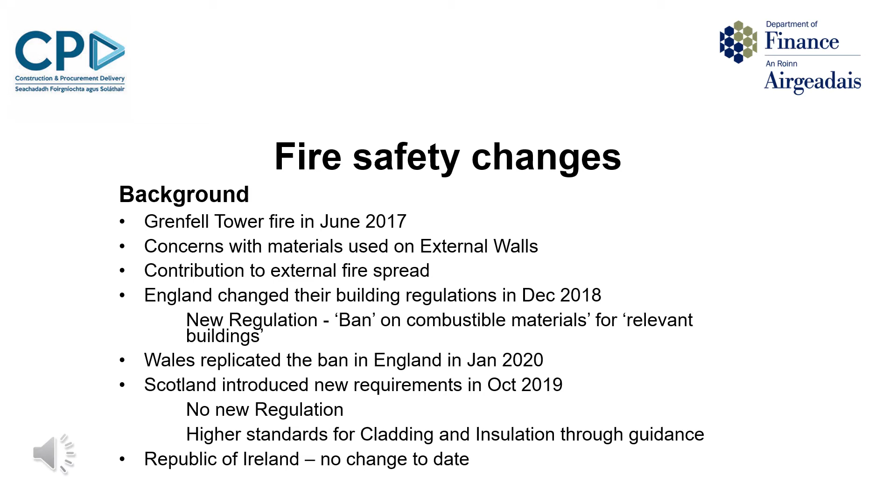Wales followed suit and replicated the ban in England, coming into effect in January 2020. Scotland have not introduced an outright ban for now through regulation, but have implemented higher standards for cladding and insulation on their buildings through guidance. The Republic of Ireland have made no changes in relation to external fire spread requirements and hold the position currently in line with here prior to these changes being made. So this amendment replicates the bans introduced in England and Wales.

At the heart of these changes is a new requirement in Part B of the Building Regulations, which will be new Regulation 23(2). It reads, subject to paragraph 3, building work shall be carried out so that materials which become part of an external wall or specified attachment of a relevant building are of European classification A2-s1, d0 or Class A1, classified in accordance with BS EN 13501-1:2018. Obviously, there are key terms within this new regulation which have been underlined to highlight their importance.

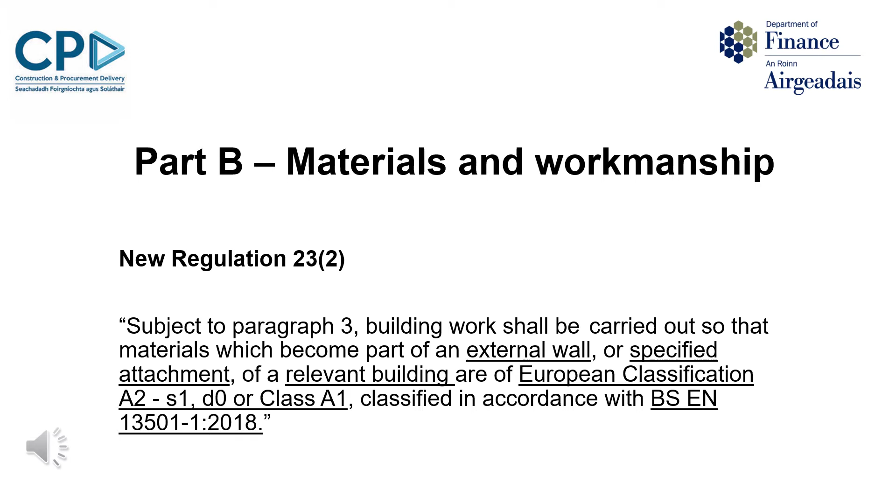So Regulation 23(2) applies to external walls and specified attachments of relevant buildings only. New definitions are given in Regulation 22 of Part B for external wall and specified attachment. Basically, the external wall incorporates everything from the internal finish outwards. Attachments subject to the new requirement are specific to balconies, solar panels, and sun shading devices.

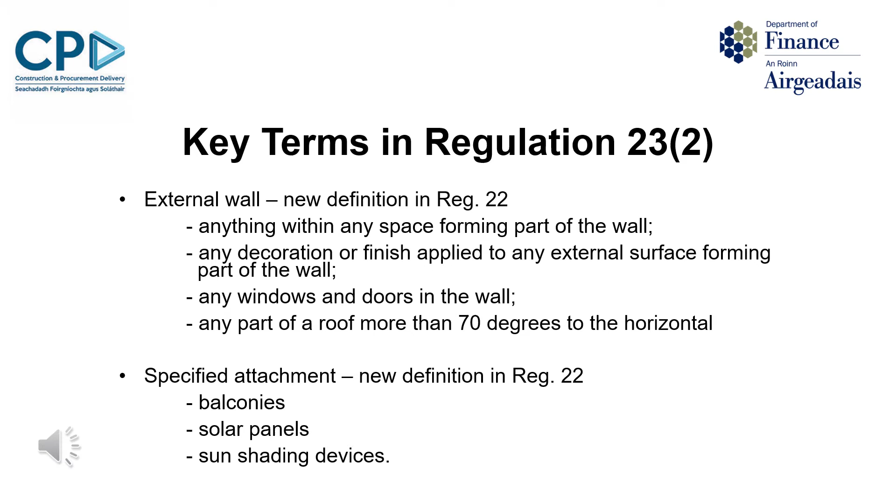A new definition for relevant building is also given in new Regulation 23(4). It reads, a building with a storey, not including rooftop plant areas, or any storey consisting exclusively of plant rooms, at least 18 metres above ground level, and which A, contains one or more dwellings, B, contains an institution, or C, contains a room for residential purposes, excluding any room in a hostel, hotel, or boarding house. Above ground level is also defined in new Regulation 23(4).

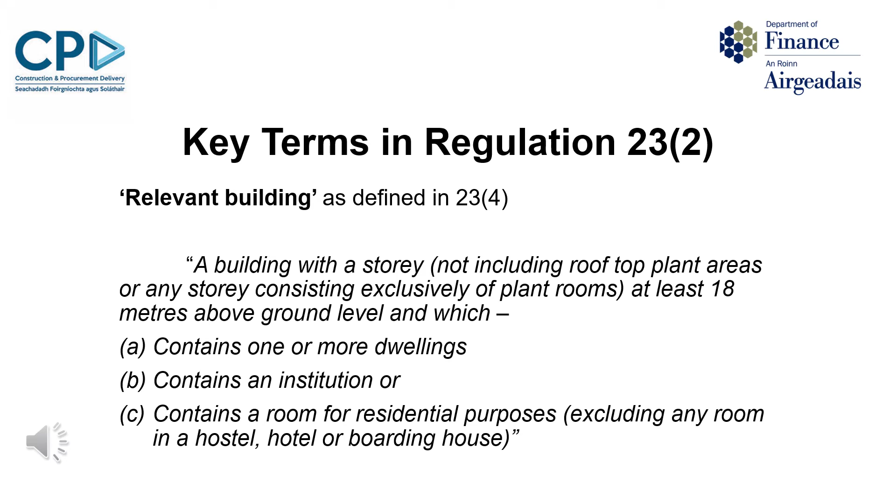Some examples of relevant buildings are blocks of flats, hospitals, care homes, nursing homes, and student accommodation. It's important to stress the 18-metre threshold that applies. It is not the height of the building, rather the measure from ground level to the topmost storey. The new requirement in 23(2) only applies to buildings over this threshold, and not to those below this height.

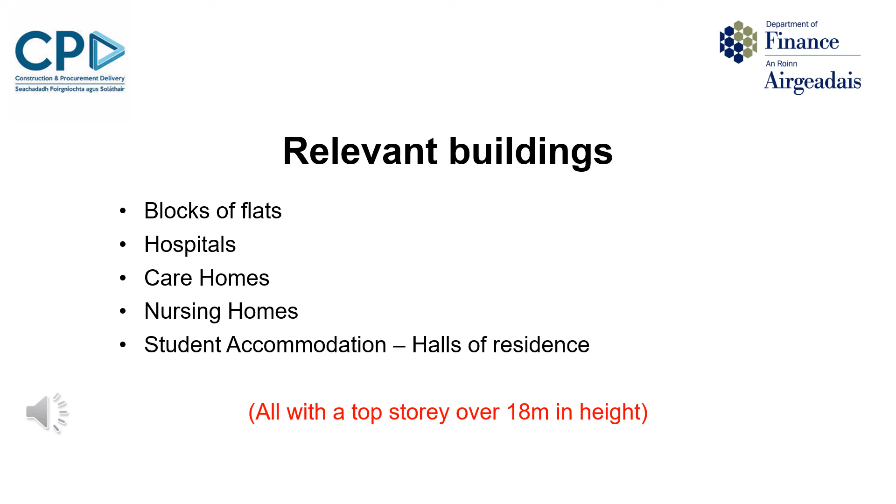Within Regulation 23(2), the performance classifications in terms of reaction to fire are given in the European classification system. Class A1 and A2-s1, d0 are performance classes achieved through small-scale fire tests and classified in accordance with BS EN 13501-1:2018. These classifications are the highest classifications possible for materials to achieve in terms of combustibility. In essence, combustible materials cannot achieve these classifications and are thus banned from use on relevant buildings.

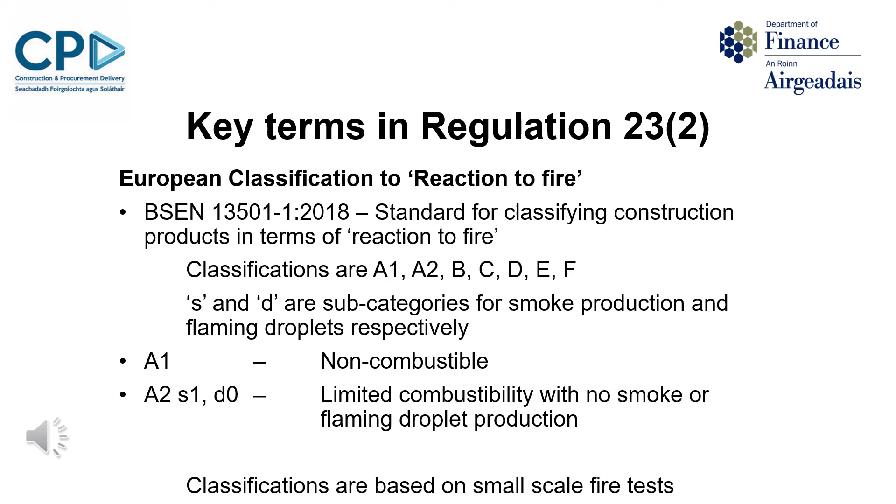As a prescriptive regulation, it should be noted that: 1. Materials tested achieving national classifications are unacceptable for use. 2. For relevant buildings, the option of a BS 8414 test as an alternative route to compliance is unacceptable. And 3. An assessment in lieu of a BS 8414 test is also unacceptable. The only way to comply with Regulation 23(2) is to use materials achieving Class A1 or Class A2-s1, d0.

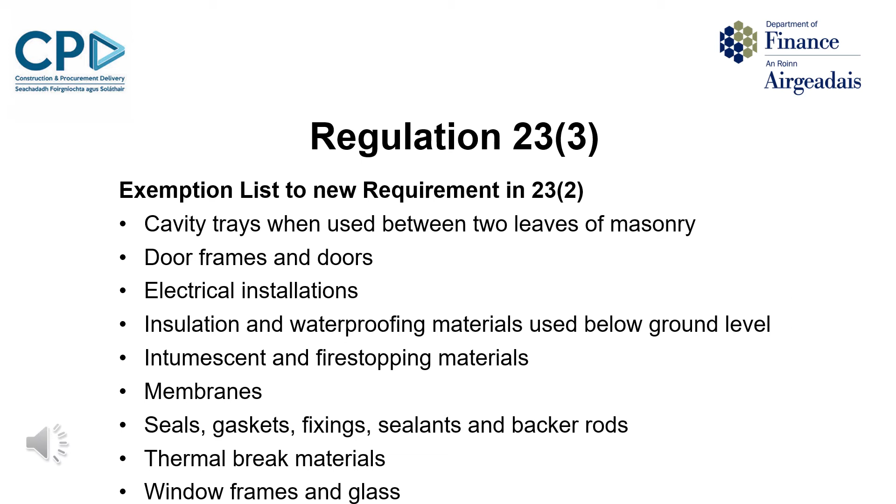New Regulation 23(3) gives a list of components which will be exempt from the new requirement in 23(2). This list is made up of small components whose contribution to external fire spread would be insignificant enough to allow their use, and also for materials and products which do not readily come in a non-combustible form. The list includes door frames and doors, window frames and glass, membranes, and other small items.

The new requirement in Regulation 23(2) applies when a relevant building is newly erected, when alteration work to a relevant building takes place, when extension work to a relevant building takes place, or when a relevant building is created as a result of a material change of use.

As mentioned earlier, because we want Regulation 23(2) to apply when a relevant building is created as a result of a material change of use, there is a consequential change needed to Part A, Interpretation and General of the Building Regulations. In particular, Regulation 8, Application to Material Change of Use, has been amended. A new table to Regulation 8 has been provided, and the notes to Table 8 have been amended to reflect the application of Regulation 23(2) through Part B for the various cases of material change of use.

With the changes to Part B, there is also a change to the accompanying guidance in Technical Booklet B, Materials and Workmanship. A new paragraph 2.14a is inserted to direct the reader to the requirements of Regulation 23 and to Section 5 of Technical Booklet E, Fire Safety, which contains further guidance in relation to the requirements of Regulation 23(2).

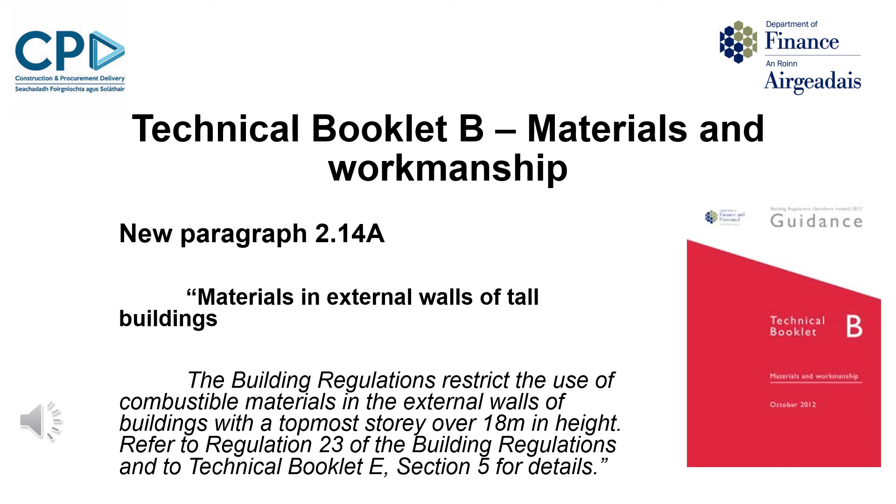The changes in Technical Booklet E, Fire Safety, consist of new guidance to new requirement 23(2) in Section 5, which deals with external fire spread requirements. Also in Section 5 of TBE, rearranged clarified guidance is given to existing external fire spread requirements under Regulation 36 of Part E. Also, there is new generic guidance in Section 1 of TBE for carrying out assessments in lieu of tests, or desktop studies by another name.

The new guidance in Section 5 of TBE to Regulation 23(2) basically reinforces the requirements to the prescriptive regulation. It gives examples of typical buildings that constitute a relevant building. It reiterates that certain components are exempt from the new requirement, and it reiterates the application of the new requirement through a material change of use.

The guidance in Section 5 to existing Regulation 36 of Part E for external fire spread requirements on external walls has been amended for clarification purposes. The guidance clarifies that Regulation 36 applies to all buildings irrespective of height. It clarifies that materials and products such as insulation and core materials of composite panels are required to be a minimum of Class A2-s3,d2 in non-relevant buildings with a storey over 18 metres in height. Obviously, for relevant buildings, Regulation 23(2) applies, and the higher performance standards for materials and products will apply.

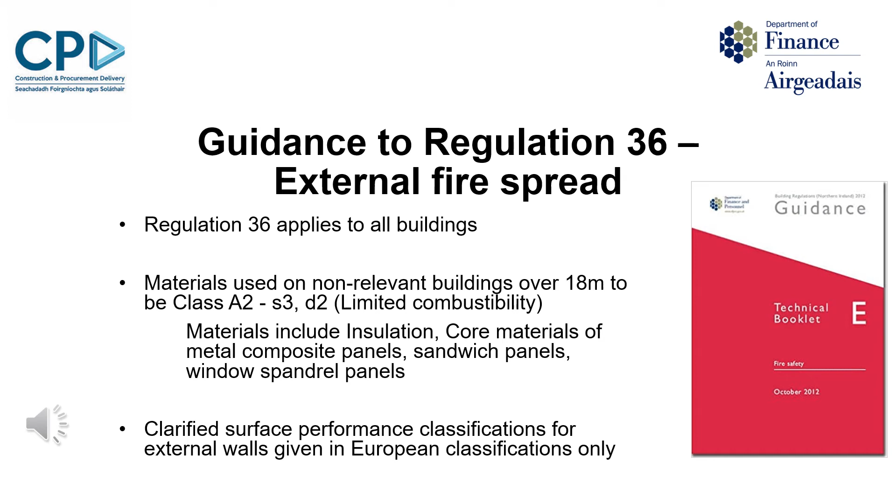Post-Grenfell Tower fire, there has been much debate about the use of assessments and the competencies required by those wishing to carry out assessments in lieu of tests. New guidance is provided in Section 1 of TBE to give general advice to those wishing to carry out any type of assessment. The new guidance highlights that assessments should not be a means to avoiding a test, that assessments should be based on relevant test evidence, that assessments should be done in line with the standard for extended application for the test in question.

In the absence of a specific extended application, then BS EN 15725, extended application reports on the fire performance of construction products and building elements, should be used to base assessment reports on.

With regard to who is competent to carry out such tests and assessments, the guidance points to organisations with the necessary expertise, such as notified bodies under the European Construction Products Regulation, or UK-approved bodies under the UK Market Conformity Assessment Bodies. Laboratories accredited by UKAS for the relevant test in question can also be assumed to have the necessary expertise.

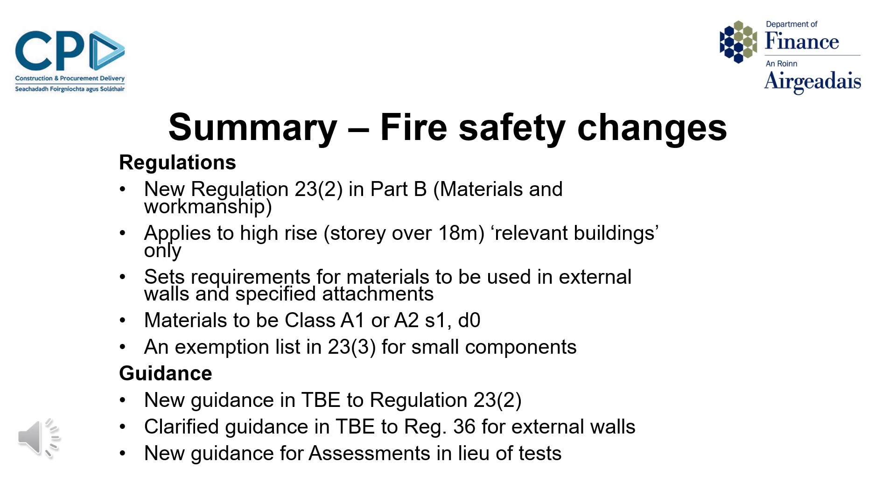In relation to the guidance changes in Technical Booklet E Fire Safety, TBE, there is new guidance in Section 5, External Fire Spread, to new requirement 23(2). There is clarified guidance in Section 5 for external fire spread requirements to existing Regulation 36 of Part E, and there is new guidance in Section 1 of TBE in relation to assessments in lieu of tests.

Moving on to the issue of radon and the changes in relation to this amendment to the building regulations. A bit of background first. Radon is a naturally occurring radioactive colourless and odourless gas which is formed by the radioactive decay of small amounts of uranium and radium that occur naturally in rocks and soil. The gas can move through cracks and fissures in the subsoil and out to the atmosphere. Most radon disperses into the air, but some collects in spaces under or within buildings.

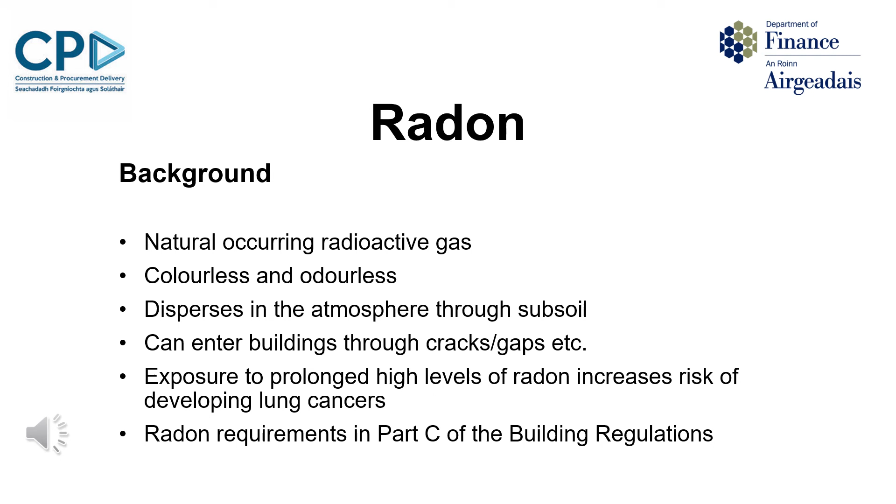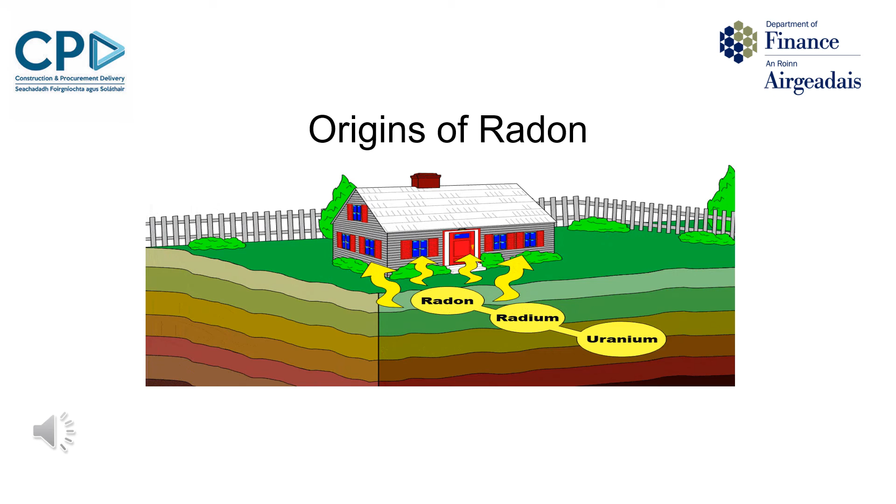As part of this amendment, under Part C, and specifically Regulation 25(3), there is a new definition for radon-affected area. It makes reference to the publication Radon in Northern Ireland Indicative Atlas. The maps contained in this publication are based on the most recent radon and geological surveys for here. Under these updated maps, it is estimated around 1 in 5 dwellings will fall into a radon-affected area. If your dwelling is identified as being in a radon-affected area, using this new atlas of radon maps, then radon protection measures are needed.

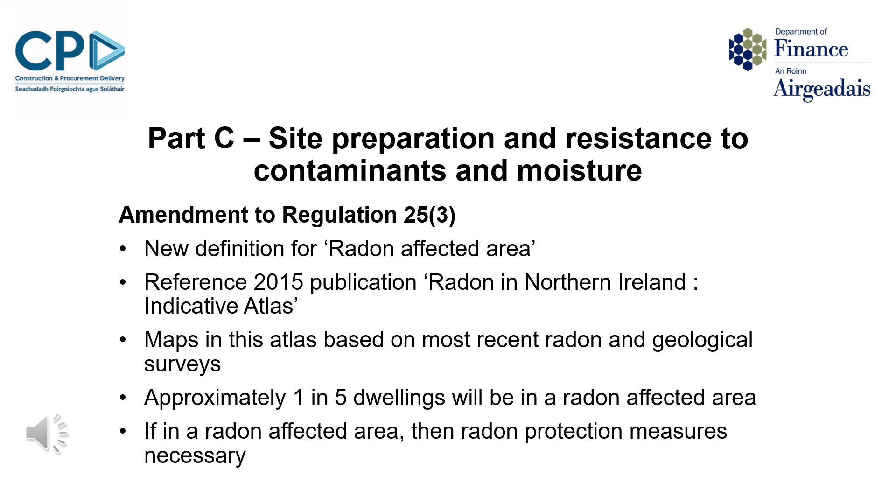Guidance to the requirements of Regulation 25 are given in Technical Booklet C, Site Preparation and Resistance to Contaminants and Moisture. The technical booklet changes now reference the 2015 publication Radon in Northern Ireland Indicative Atlas to identify if you are in a radon-affected area or not. The technical booklet also references BRE-produced publication BR211, Radon Guidance for Protective Measures in New Buildings of 2015. It is this document which should be used to establish the level of protection measures necessary or not if identified as being in a radon-affected area.

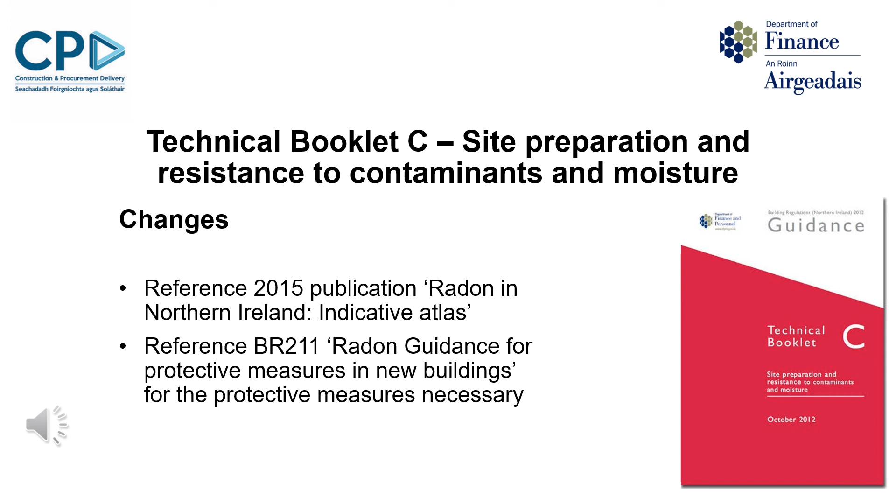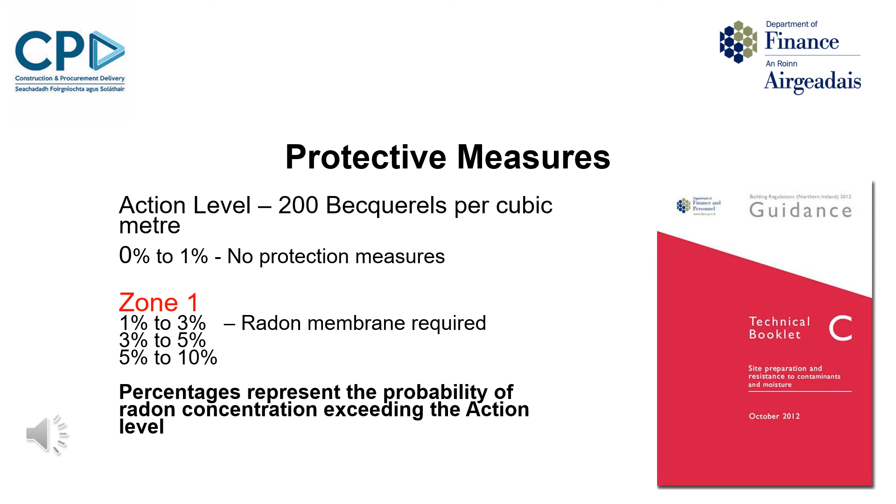Radon is measured in becquerels per cubic meter, with the action level being identified as 200 becquerels per cubic meter. So if the probability is 0 to 1% of radon concentration exceeding the action level, then no protection measures are necessary. If the probability falls within one of the 3 categories in Zone 1 of exceeding the action level, then a radon membrane should be installed to limit radon ingress. For higher risk, where the probability of radon concentration exceeding the action level falls into one of the 2 categories in Zone 2, then a radon membrane should be fitted, plus some sort of means to ventilate and extract the radon from gathering under the dwelling.

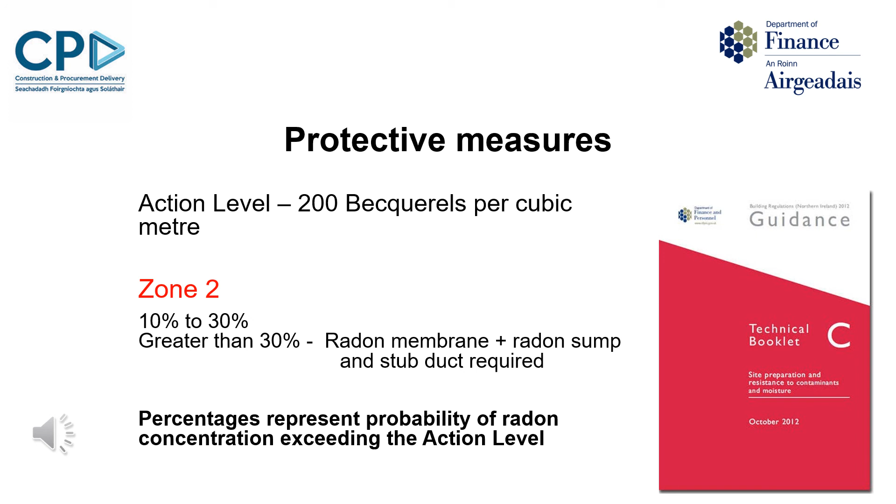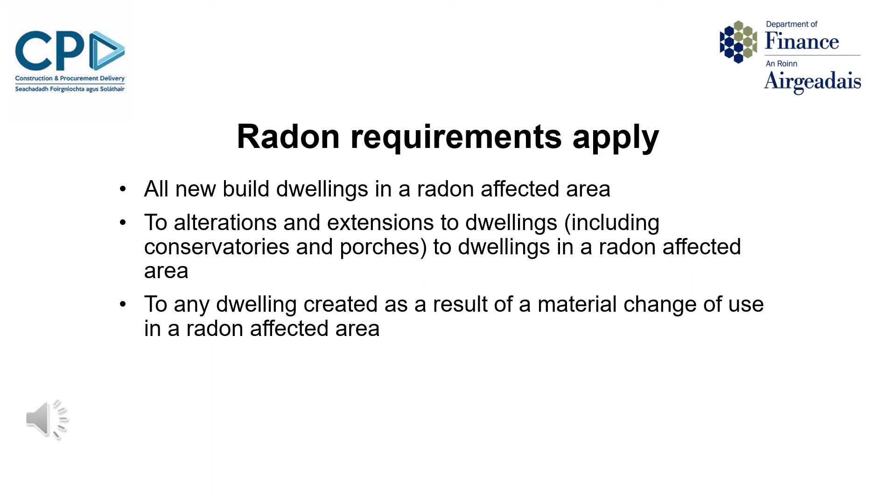Please remember that radon requirements through Part C in the building regulations do not apply to existing dwellings. The requirement only applies when a dwelling is newly constructed, when alterations or extensions are carried out to an existing dwelling, or when a dwelling is created as a result of a material change of use. All of course dependent if in a radon-affected area or not.

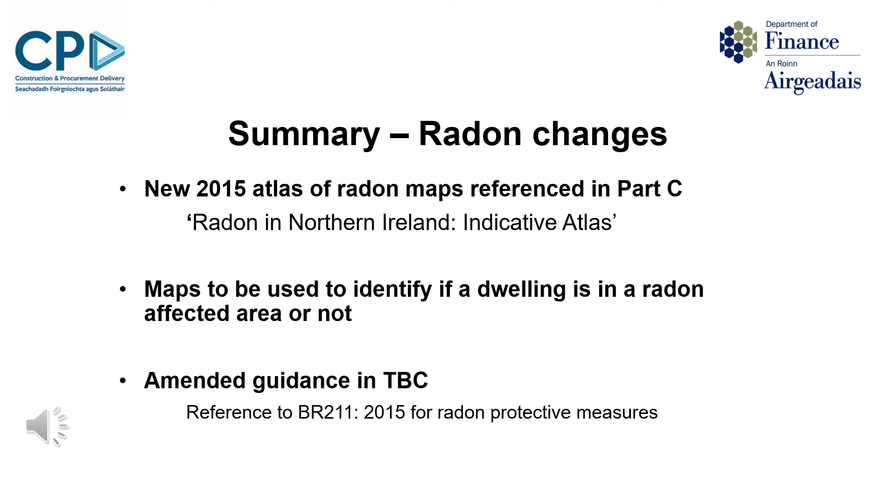To summarise the radon changes then, there is a new definition for radon-affected area in Part C, which references the 2015 publication Radon in Northern Ireland Indicative Atlas. The maps in this publication are to be used to establish if in a radon-affected area or not. The amended guidance in Technical Booklet C refers to BR211 of 2015 for the radon protection measures necessary or not.

To summarise in totality then, this amendment to the Building Regulations of 2022 makes changes to Parts A, B and C of the Building Regulations to address fire safety and radon issues. These changes are achieved through the new statutory rule entitled the Building Amendment Regulations Northern Ireland 2022. As a consequence of the regulatory changes, there are technical guidance changes to technical booklets B, C and E. These changes are achieved through the amendments booklet AMD7. This brings to an end this awareness briefing on the Building Regulations 2022 amendment.